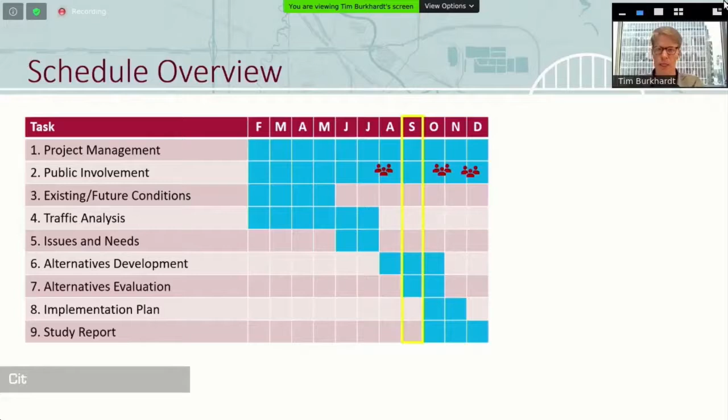Okay, agenda as it is, mostly give a recap of the public open house and then get into the traffic information, which you've seen in the memo that was already sent around. And so as usual, I just do this to review and share where we are. Here we are in September, headed toward being concluded with everything by December. I think we're in a good place, but plenty of work to be done, including our evaluation and sharing those results that kind of wraps things up and heads us toward next steps.

This list you can just refer to if you want to. It just keeps track of our consultant deliverables and what we're working on. So we'll talk about the future traffic for the two bridge options and the no build. And then, as I just mentioned, where we're headed soon after this is putting together that direct comparison evaluation and some graphics to really pull everything together to see what we've got with the different options. So that's probably the moment we've all been waiting for, but today it gives a preview of what we're seeing in the traffic results.

So public open house, recap that, kind of what we did and what we heard. The purpose, as I think you know, just make sure people are aware of the study, and then specifically share what we call the purpose and need, essentially why we're doing it, what the needs are, and that future traffic and safety information without the project, what we call the no build, and then get input on both of those items.

Recap, we did everything we could to make people aware of the project and the opportunity to participate, paper and electronic notices and use of our project-specific website. We also did a live presentation. I know a couple of you were there, which I appreciate. This was back in July, which already seems like a long time ago. And then that was also live streamed, and the presentation was shared on the website, and the website, we kept that open for 3 weeks for public comment.

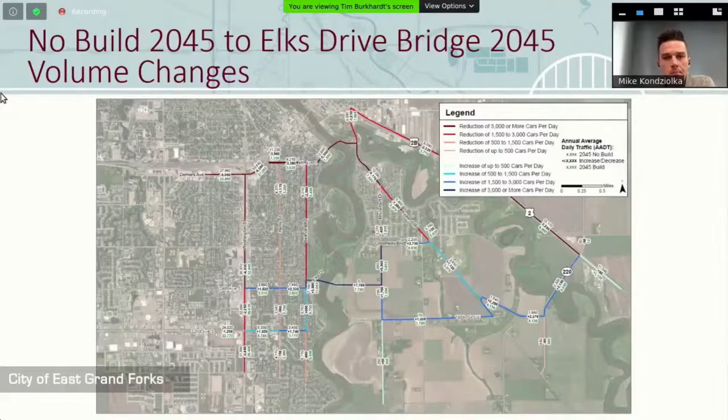We can hop to the next. So part of this little summary here is just to show that for the bridge specifically, most of the traffic that would be anticipated to use the bridge would be using that by the 2030 year. There's not substantial growth that would be expected between the 2030 and 2045 forecast years.

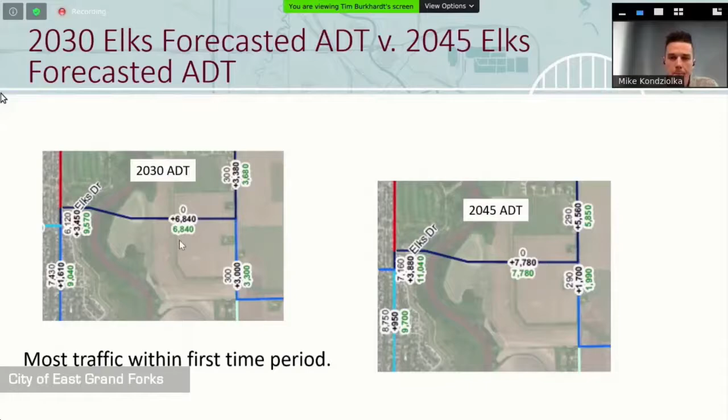Yvonne, I just wanted to highlight that you do see lines that cross the river and represent a bridge location, but I want to make it clear that these lines by no means are a final line that show where the actual bridge alignment will be. It's, again, just a conceptual line showing you how we would connect 32nd over to Rhinehart, and there's a lot of wiggle room as to the exact alignment if and when we do come to construct a bridge at this site. 32nd Avenue is obviously a touchdown point on the North Dakota side. On the Minnesota side, we are purposely allowing it to land on Rhinehart Drive north and within their flood protection system. So that's another reason why there is that curve in the bridge.

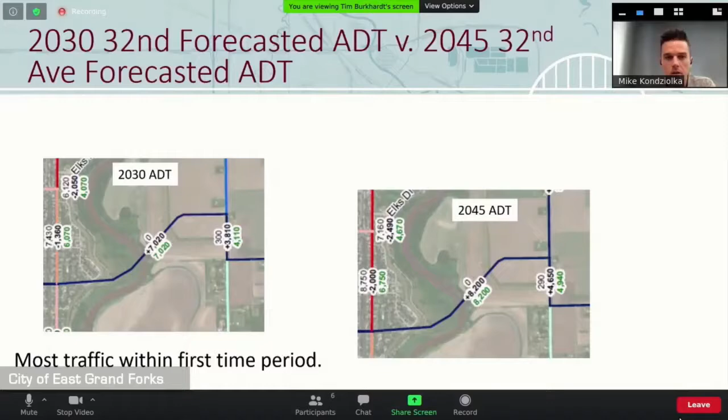If we go to the next slide, it's again comparing. We're expecting based on the forecasts that most of the traffic using the bridge would be using it by that first forecast year, 2030, with minimal increase in the horizon year 2045 compared to 2030, with most traffic within the first period here.

So looking at the results of the analysis, the map on the left here is pointing out with the stars the intersections that are expected to have issues. Yellow being starting to approach capacity, starting to experience operational issues, and then red being failing operations, experiencing significant congestion during the peak hours. And then this table at the right is indicating the actual level of service grade as well.

And that one is shown slightly differently because there were two options evaluated here. There was the existing stop control. We also looked at the roundabout, given that it is and has been considered for an improvement by the 2030 analysis here. So the stop control option there would fail. The roundabout would operate at level of service A. And we can move over to the 2045. We're going to see similar results here.

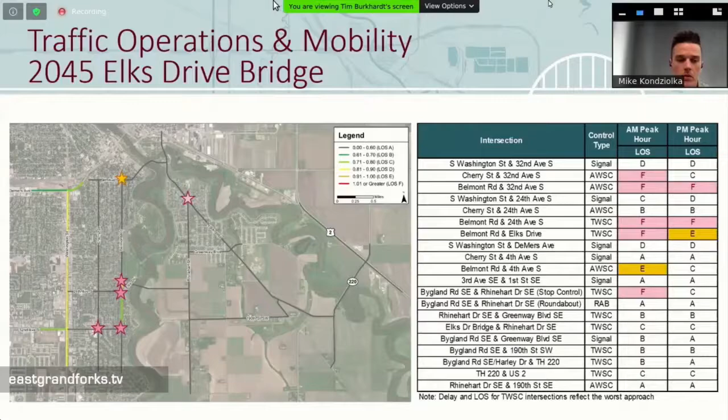Does that make sense, Tanya? Yeah, I drive that every day. If you're trying to turn people left and get people from Belmont and then offload people, it's a bottleneck anyway, and that's a really tight space. But anyway. No, that's a good point.

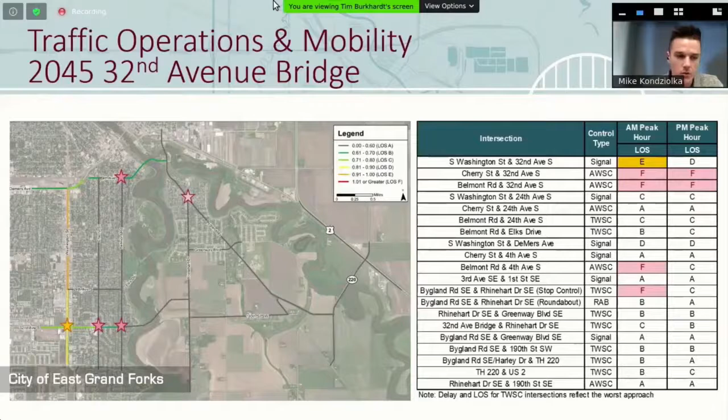No, I do understand it. And so I guess there's kind of two pieces to this. On the East Grand Forks side, at Bygland and Rhinehart, the reason this is shown differently is because it was evaluated as the existing stop control, then also evaluated as a roundabout. The roundabout would process traffic efficiently and operate at level of service A or B. The existing stop control would operate at level of service F. So that's looking at it just as the existing condition, without any type of change or improvement. That's why it shows up in all of these options, it's just keeping that same stop control condition.

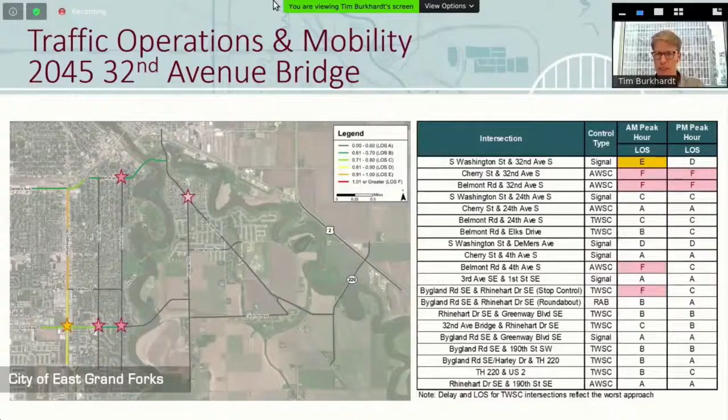And Mike, I know you're about to flip to the comparison, but let me try to capture your question, which was, are we having issues with that intersection under the no build? And I think the answer is yes. Kind of the question, yeah. The actual question is, when you look at the residential area to the south of that, is not enough of that residential area going south now and utilizing the new bridge? That's really the question.

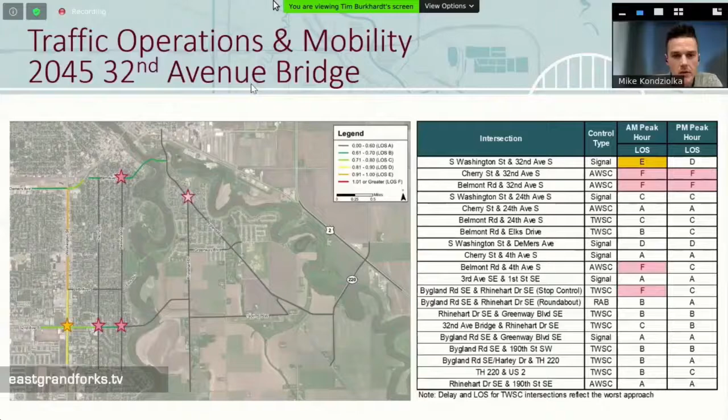I think it's kind of a bigger picture, and less isolated to the specific neighborhood south of here. It's more of a regional shift. There's volumes coming from 220 and from the north as well. Yeah, this is kind of a summary. So there are volumes coming through here. I think it's more reflective of the fact that the side street stop control on Rhinehart under any condition wouldn't be sufficient for 2030 or 2045 volumes.

Got it. Okay. And maybe looking at where this intersection is in relation to the existing bridge versus 32nd, just making this up geographically, the question is whether the new bridge is going to pull trips from here to the south rather than to the north. Obviously, it depends on where they're going, but it's somewhat equidistant, so we wouldn't necessarily expect them to all peel off and go the other way, right?

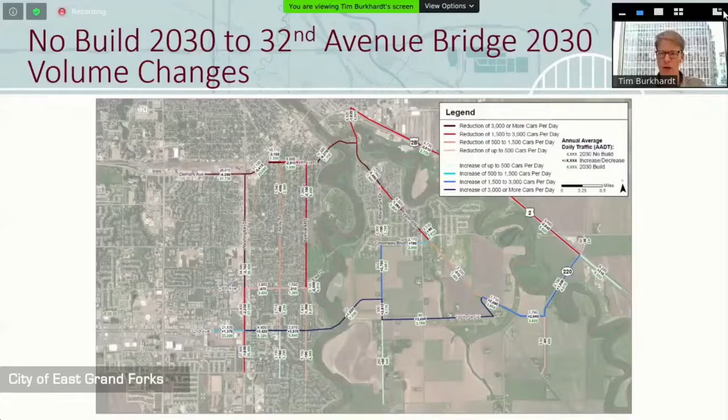Okay. Get back to where we were. So how about this? Perfect.

All right, and so this is just kind of a comparison table. This is looking at the 2045 condition and then also adding in the no build condition, which we went through in the prior meeting, but just a side-by-side comparison looking at the three options and what would be expected by 2045 with any of them.

So some similarities, I guess some of the main points are there are expected issues in any case at some of the intersections on 32nd at Cherry and Belmont, and then Belmont and 4th as well. And like we were saying, the Bygland and Rhinehart intersection with the existing stop control, all of those locations would be expected to have failing operations no matter which option, either no bridge or either of the bridge options went forward. Any questions on this specifically and what we're showing here?

I guess I've got a question, and I'm trying to think of how to say this because I realize it might be a little heterodox here, but as I was looking through this and looking back at the survey responses from the public input session, there were quite a few people that mentioned, I think it was safety, or like the school children going back and forth.

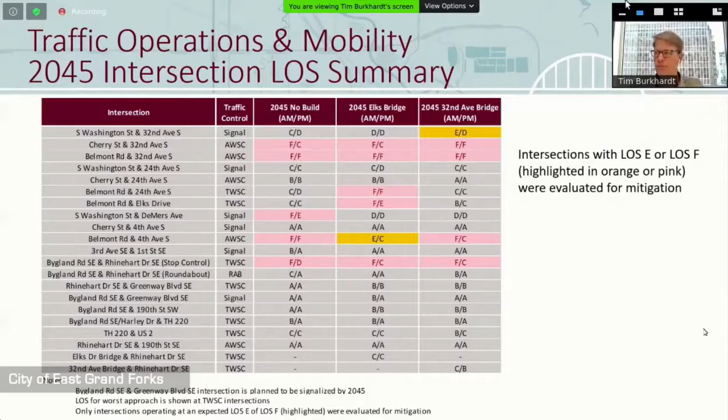And so this, looking at the first piece that we just discussed, was identifying locations that would be expected to have operational issues. And then the next part of that is starting to look at options for fixing those issue locations. And one of the things that we do in that analysis is look at warrants to change the traffic control type.

So if it's an existing stop control intersection, there are options, and there's a methodology to evaluate if a traffic signal is warranted at that location based on a number of criteria, but mostly looking at volume conditions. And then there's also consideration to change if you're going from a side street stop. There are all-way stop control warrants to incrementally build up the control at the intersection.

So this table is just summarizing that warrants analysis for each intersection under the no-build, Elks and 32nd Bridge options. For each of those issue locations, what warrants would be met based on the 2045 projected traffic volumes.

So essentially, we're looking at both the signal or an all-way stop control warrant being met most everywhere except for a few locations, which are 32nd Ave and Cherry under the no-build, 4th and Belmont under the Elks Bridge, and also under the 32nd Avenue Bridge.

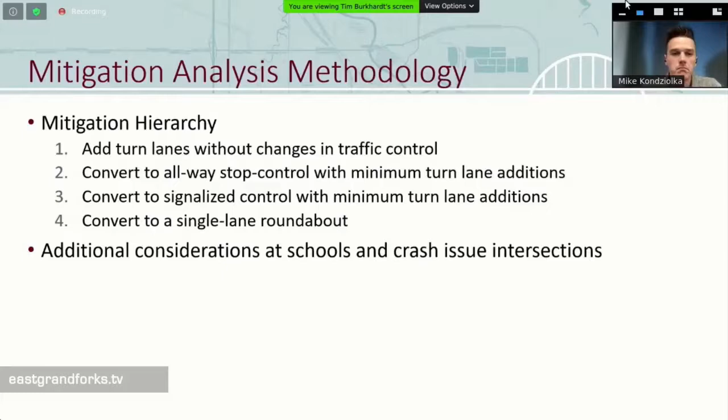And just to note that there are additional considerations that can change the priorities if there's a location with an identified crash issue or with schools nearby, where it's not as simple as just looking at these. There are the safety considerations where some of these that may be lower cost may not be adequate for those locations.

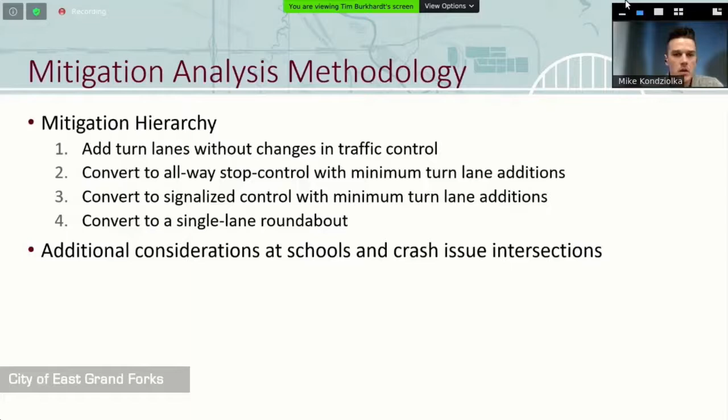So this all culminates into this next table, summarizing the mitigation options. So again, each intersection that had an identified issue is shown here, and I know there's a lot here, so I'll try to break it down a little bit. But for each alternative, we're going through and showing what's the existing type of traffic control, and what was the level of service in 2030 or 2045.

And then again, this is what we looked at in the warrants table, what are the options for a solution at this location? And then in the next two, this is where we're just identifying locations that have a school adjacent where there needs to be additional consideration for pedestrian crossings and safety. And then also locations where the safety analysis in the prior analysis showed there's an existing safety or crash issue.

And so with that, this furthest right column kind of summarizes every option for a potential fix to the location that would result in a level of service D or better. So it would effectively improve the intersection. So I know that's a lot. Are there any questions on specifically what's shown in this table, or can I clarify?

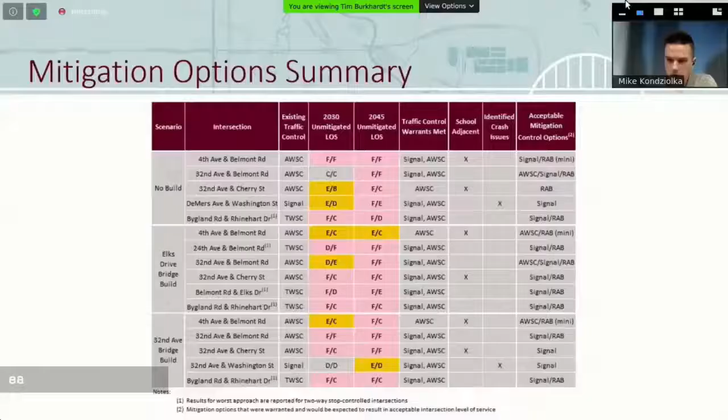Right. And that would be one of these locations that would be called out as school adjacent. So the traffic analysis did look at the roadway segments there, they were included in the model. The specific driveway locations were not analyzed as part of this kind of higher level planning study.

Those, of course, are specific considerations, but we looked at operations on the roadway and at the intersections adjacent, and then in terms of looking at what would be an acceptable solution for those locations, that's where we flagged these school locations where pedestrian crossings are definitely an important factor in what should be considered here.

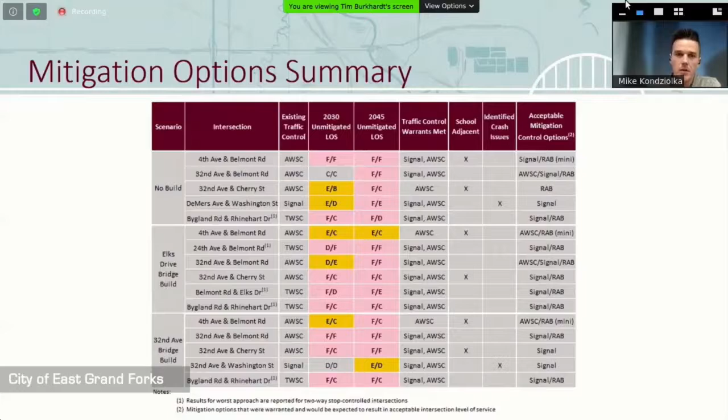We would like to see more study on that 32nd corridor, though, specifically how we would address mitigation for those pedestrians that are utilizing that corridor as a crosswalk. I'm trying to drill down to, as we have kids crossing not at intersections, how we would safely mitigate and address that, because I understand that to be a very, very large concern from both of those communities. Absolutely. And that's coming from Chris, right?

Correct. Yeah, if I could just jump in on schools, I was saying to Earl earlier today, from the first time we started working on this study and started to get to know the issues, that schools issue came up immediately and hasn't stopped. So that's been in our minds, and was one of the reasons, even on this table on the screen, which otherwise might not have a call out for schools, we wanted to make sure to highlight that, because it is both a need and an opportunity.

I do want to acknowledge on the schools issue that from all the data that we've seen, on one hand, the technical data doesn't show, fortunately, any elevated incidents of crashes happening around the schools in this area. That doesn't mean there aren't close calls that aren't reported. And I know there's a lot of other work being done on schools, whether it's the Safe Routes to Schools work, or the bike walk survey that the schools are doing, or site-specific crossing patrols.

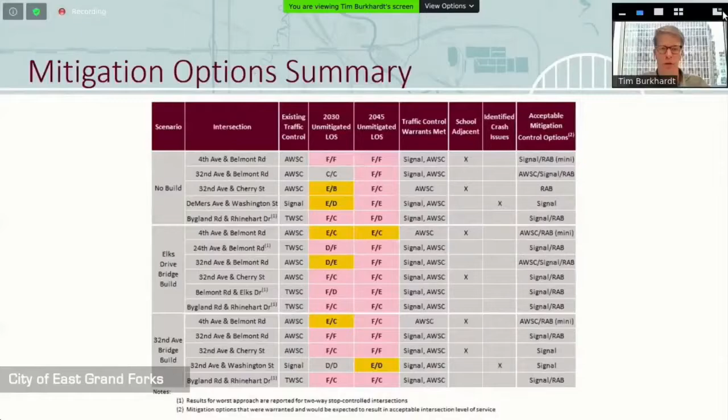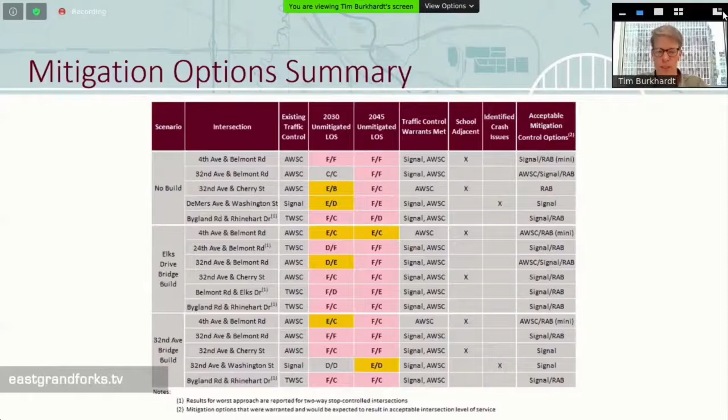Yeah, maybe again, jumping ahead, depending on where the study concludes, that there is a caveat or condition, whether that comes from the study itself or from others, that certain more study or what we would call mitigation needs to be considered, even if it's beyond that level that we're going to here.

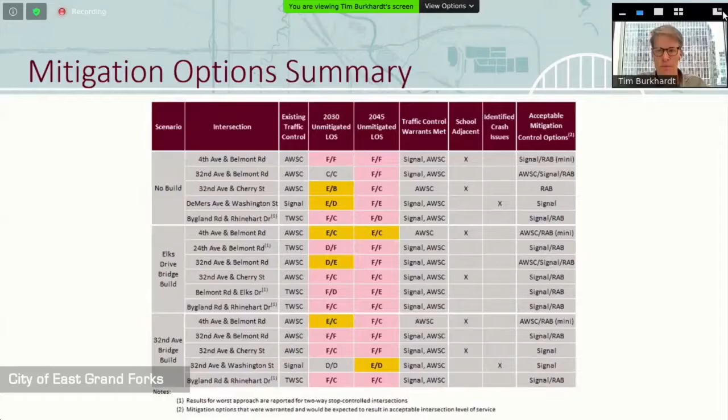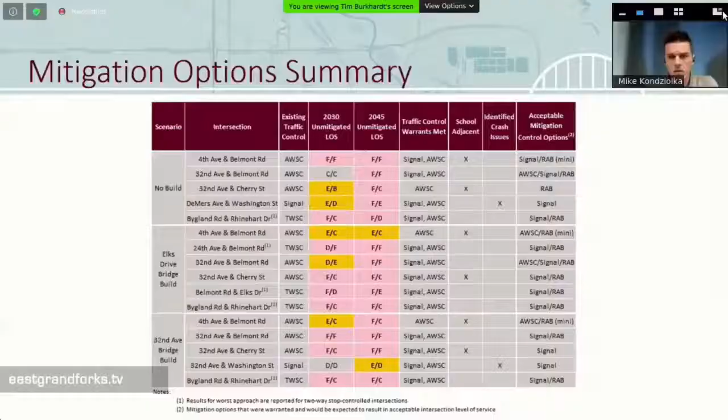Okay, let's move on in the interest of time. Mike, I'm not sure where you were on this slide here. I think we covered this and can look at the next one here and start to get into

assumed. So this next piece is kind of one of the last pieces. For the purposes of this study, there's kind of the universe of options for mitigation on that prior table in the last column, and then we need to hone in on a specific one just for the purposes of assessing a cost for each of the options, to look at these globally. What would the cost of one of these alternatives be in order to bring everything to an acceptable level in terms of traffic operations?

So this table summarizes the assumed mitigation option for the purposes of that cost estimate. And this details the specific mitigation that would be required, following that same hierarchy of steps for mitigation that we went through 2 slides ago. Without getting into every note or every specific turn lane required, we go through and talk about what would be the assumed traffic control for the cost estimate, what would that result in terms of level of service, and then discuss the potential considerations for this.

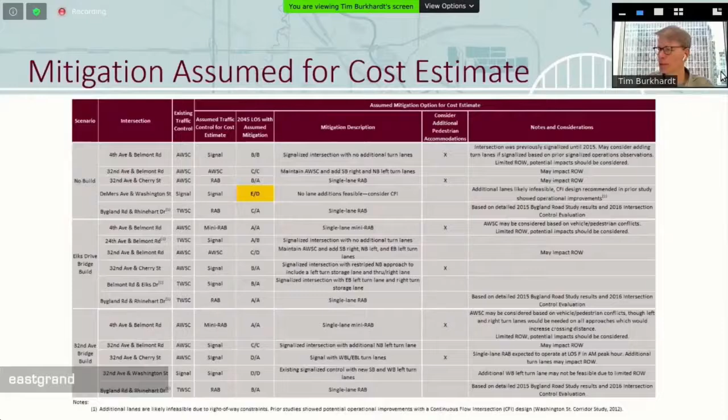Okay, getting close to time. I know you got one more. Oh no, I thought you had one more table. Why don't I take this summary? Mike, were you done on the previous one? Yeah, feel free.

So again, I do and I don't apologize. This has been more of the technical under the hood presentation. The next one will do a better job of comparing and contrasting, but trying to back up from intersections to the bigger picture of the bridge study, these bullets show that with either of the build scenarios, the bridge, Elks, or 32nd, we do see that more balanced distribution of traffic on the system, which is not surprising and was one of the main purposes. And so although there is redistribution and there is future growth, it's not oriented just toward one neighborhood, but is more spread across the cities.

Second point, as we saw in the tables, but just to recap, without the bridges, some of these key intersections that we've been focused on all along, Belmont and Fourth and DeMers and Washington, still require significant improvements. So even if we say, well, with the bridge, we need to add a turn lane at one of those intersections, yes. However, without a bridge, there's something similar or probably more significant that would be required, again, to sort of mitigate to the same level.

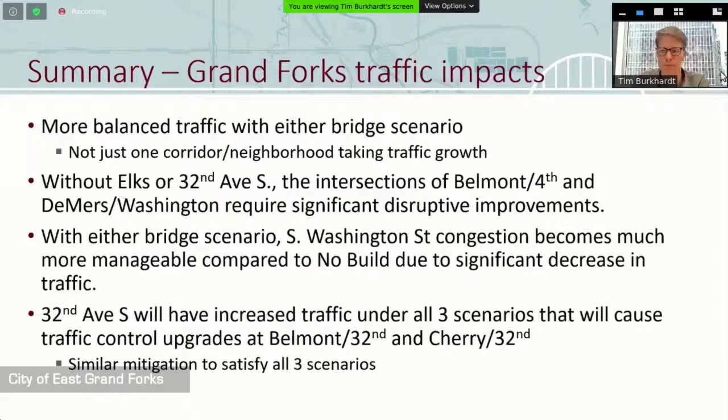So I do want to stop and ask for some input, but we have a couple more slides here. I think we won't have quite as much time for my round robin, but maybe it'll be more of a lightning round. Let me turn it over to Earl to talk about land use plans.

This is just a slide to get back to how we do forecasts. Those are primarily utilizing what each city is saying their future growth plans are. And as we've told you, both cities are updating their land use plans. East Grand Forks is ahead of Grand Forks schedule-wise, and so you'll see that they have a draft document that's out for review and comment. It's not final by any means, so it is subject to change.

The one thing for this study group to be aware of is that the East Grand Forks land use plan really doesn't have a lot of changes that are real specific to this bridge question. There are changes, but there's not a big, massive change happening on the East Grand Forks side in their land use plan. So it won't have much of an effect on our traffic forecast for this bridge study.

On the Grand Forks side, we're further behind compared to East Grand Forks. The one thing I would alert you to on the Grand Forks side is we are talking about a higher annual population growth rate than what we have in our current plans. So simply more people will mean more trips. And depending on where the city plans on putting them, whether to the south or to the west of the interstate, that'll have more impact on the use of these bridges.